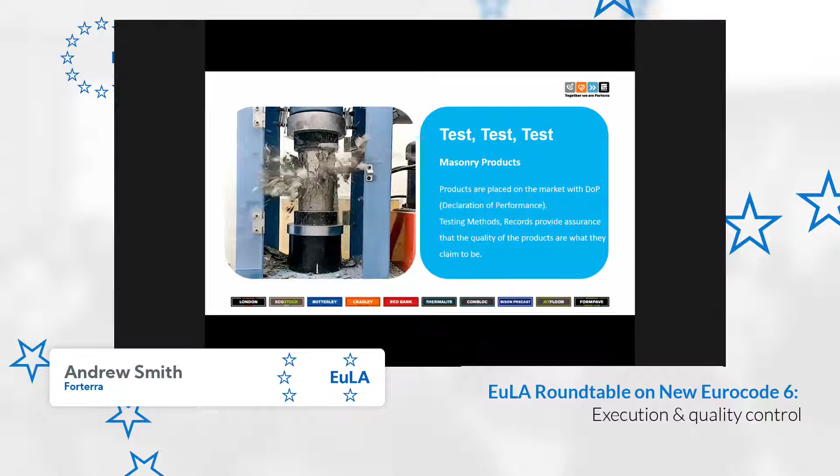This is slightly different when we come into the realms of the built environment and how our products are used. And basically, what we're looking for in this context is some form of standardization, or at least an agreement with regards to the process of construction. And this is where the Eurocodes do come in. So if we're trying to standardize the construction process, then the obvious way to go is the way we've gone in much of our production facilities, is to automate.

But whilst robotics and systems are in place, they haven't quite yet made it from what I would call the factory-made masonry applications. They haven't made it out into the big, wide, real world where it rains. Well, certainly in the UK, it rains very regularly, or occasionally, as today, we have a nice spring day, but the temperature overnight was very cold. So automation, robotics is only part of the answer. And whilst there are systems out there, we haven't really got there yet with regards to how we use these systems in order to facilitate the standardization of the construction process.

So with that in mind, we have to use what's known as the human interface, and that is the construction labor force. And this is important because they are sentient beings, our construction sector workforce, and they think for themselves and they do things. Whilst we can provide them with instructions, sometimes they don't follow those instructions, and therefore we need to make our construction materials and the process of construction as simple and, as I said before, unambiguous as possible. So what do we need to do? Well, in essence, we need to define the task.

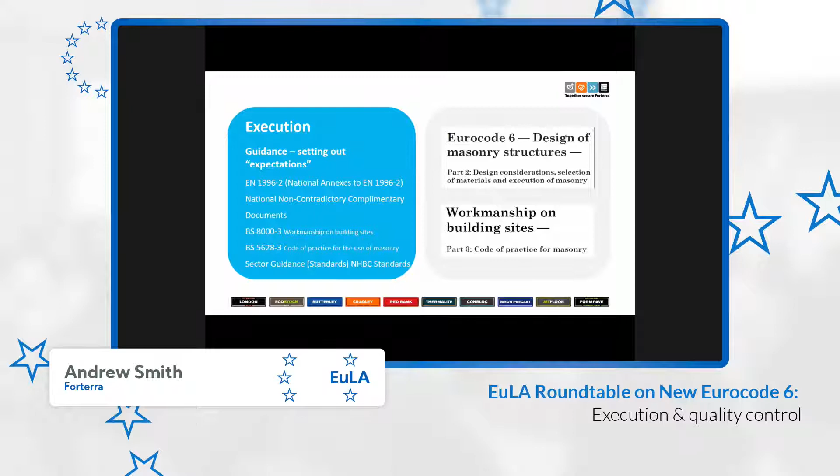In addition to that, we also have sectoral guidance documents or pseudo standards. For example, within the context of house building or domestic dwelling building, we have the National House Building Council's standards, which is essentially a manual very similar to a European standard, but it lays out both the context of what the standards for the product should be and how they should be used. So there's a lot of guidance out there with regards to how we can execute construction, in particular use of masonry.

But that leads us into the subtle nuances of individual parts of Europe that have slightly different approaches to this. I'll use two examples here where certainly in the UK we have the human interface element of it still somewhat to be desired in terms of total quality on building sites. And that arises to problems coming from protection for the weather during the build process, and also jointing.

For a lot of Europe, I know the jointing process is something where basically the masonry units are bonded together, and then subsequently a specific specialist contractor comes on and finishes off and does the pointing of the joints. In the UK, that is done simultaneously by the mason or bricklayer, and that can result in a number of issues, particularly these days where we're using very lean mortars - meaning very low cement binder contents for masonry construction, where the actual pointing of the joint is very important for the overall longevity and durability of that masonry structure.

Going back to the first one, protection from the weather - the issues we find there are that if during the winter periods, particularly when the temperature is hovering at or about 0 Celsius, there's potential for frost in the overnight periods, which can subsequently lead to damage of wet mortar during the initial curing and setting phases it goes through once the mortar has been laid and the masonry units are being built up. So it's very important to protect that.

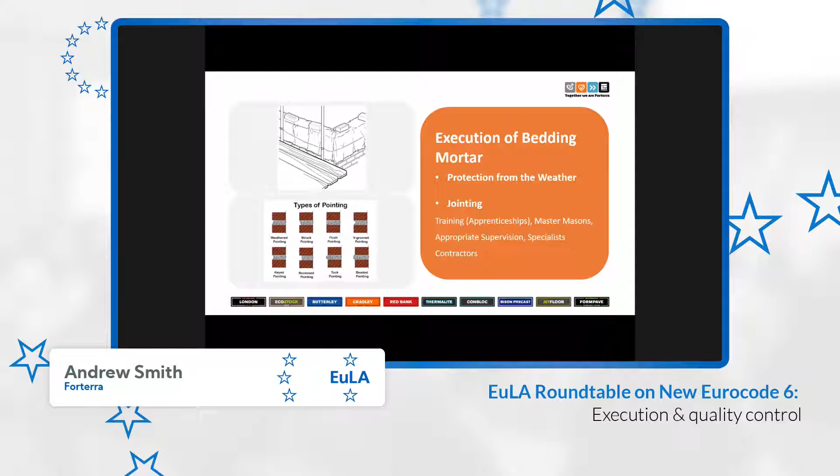So in summary, execution of masonry, as far as the Eurocode perspective is concerned, should evolve over time. It should incorporate best practice, and ultimately that is what it is - a document that shows best practice, but it should focus on outcomes. Going forward, we need to be outcome-driven as opposed to prescriptive in terms of the process of achieving those outcomes.

It should reflect the national or local styles of masonry construction, because that's what gives masonry the beauty behind it. I can compare masonry from the Netherlands with masonry from the UK, with masonry from Spain or Portugal, and they all have their subtle intrinsic differences that make them unique to a regional context, but also the attractiveness and variation that is so attractive to an architect.

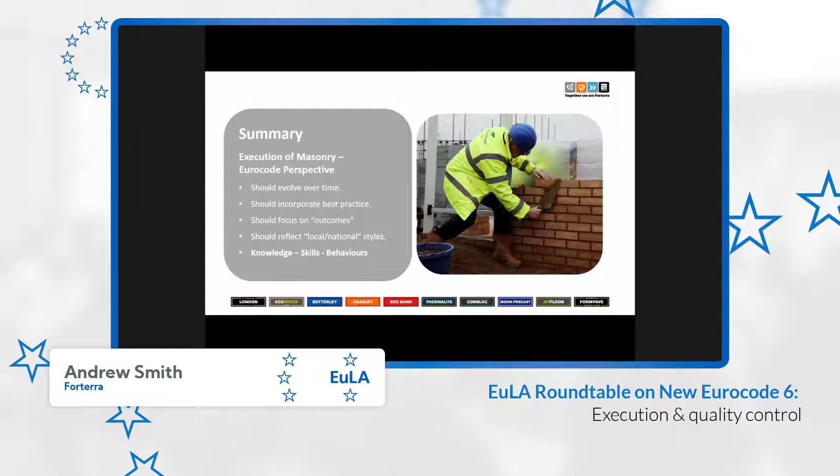But the last point I would like to make is that it is all about three key elements. It is knowledge - the passing on of knowledge from us, the experts in the materials sphere, to those who are experts in the construction sphere. It's the skills required to execute high precision, high quality construction. And finally, it's the behaviors behind how we communicate, how we translate, how we see those different construction projects going forward. So I'd like to thank you for your attention, and I'll hand over.

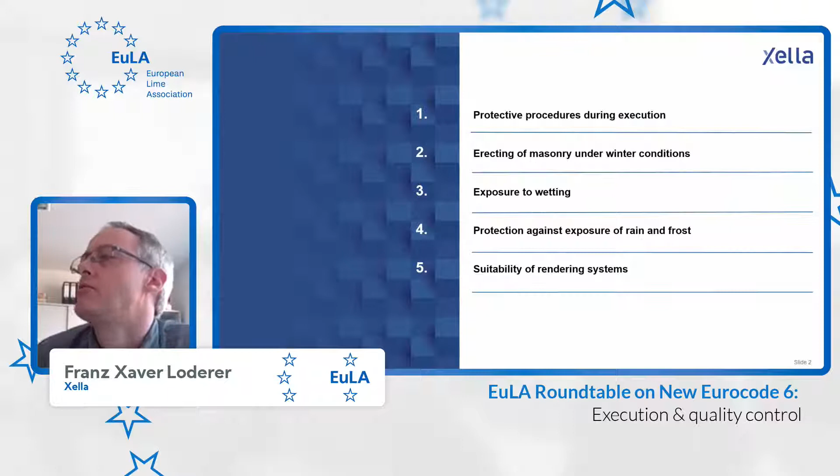Just to give you an idea of what I will talk about: I'll show you some protective procedures during the execution of masonry. One point, which Andy mentioned already, is that it's a difference in which region you erect masonry - you have very different conditions. Winter conditions are not a topic in every country, but in many, so it's a very important topic to find a good solution for that. We have exposure to wetting, and related protection measures against this wetting and exposure in general, not only in terms of rain, but also frost. At the end, I want to show you some additional possibilities for how to find suitable rendering systems, which can help protect against rain and frost.

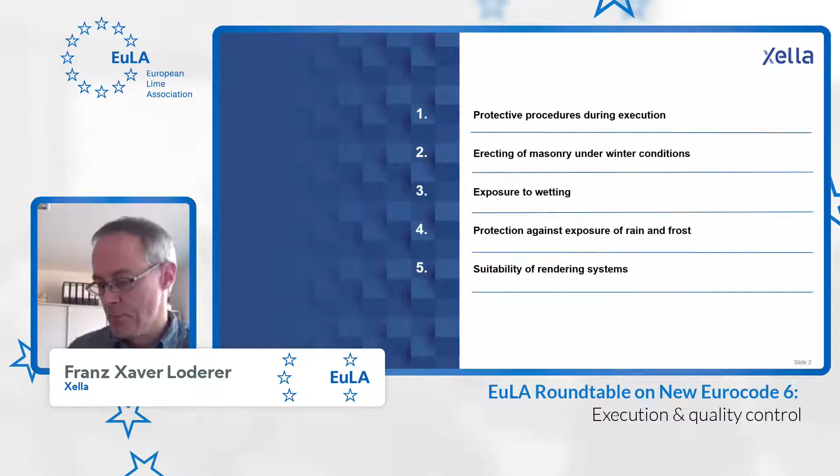So to go directly into the standard, that's a text coming from the latest draft of EN 1996 Part 2, from the 2020 draft. There is one chapter, protection against rain. It refers first to the completed masonry, that it should be protected from rain falling directly onto the construction. That's clear, especially in the phase when the mortar joints have not hardened completely up to that time.

When you have jointing, the joints shouldn't be washed by driving rain in that phase, so you have to protect that. For the completed masonry, sometimes there are additional measures like a provisional downpipe, which shall be installed. It's important that you do that directly after you finish the masonry works, so there are no long time periods in between which could damage the masonry, for example by wetting.

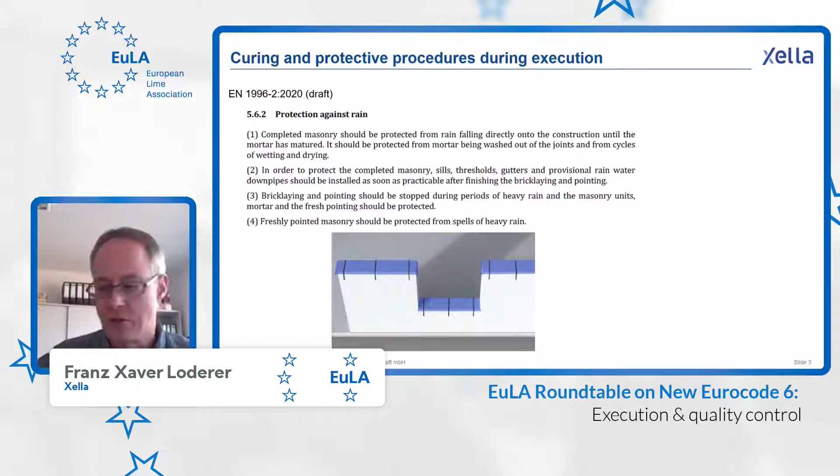If you have heavy rain, it's clear that you should stop the bricklaying and wait for better weather periods. This is also true for freshly pointed masonry - you should protect the pointing works, for example by covering with special foils or whatever, just to protect the pointing.

In terms of winter conditions, there's another chapter from the standard, the next one, 5.6.3, protection against freeze and thaw cycling. You should avoid damaging especially freshly completed masonry and pointings - you should protect it against freeze and thaw cycles, and you should not use frozen materials for bricklaying works. Both messages are very simple, of course, and very general.

So I'll give you some examples from the German National Annex, which gives some additional information about that topic. For example, there's a message that in case the place where you do the bricklaying is under such conditions, you should protect your working measures and protect the masonry against this winter impact. You are not allowed to use anti-freezing agents, which is not the case all over Europe - several countries, for example the Scandinavian countries, allow the use of anti-freezing agents.

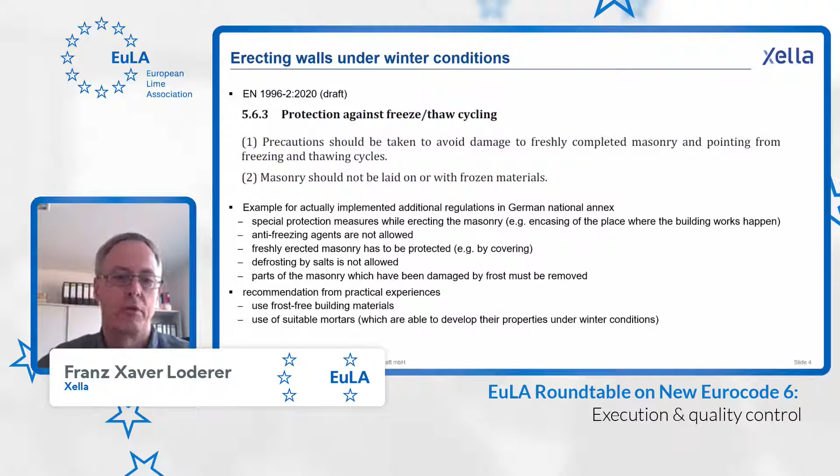For Scandinavia, for example, there are special mortars which can be used even down to -5 and -10 degrees, but nevertheless, you have to keep in mind that you should not use frozen materials - that's sometimes the problem. You have a good mortar, but if you use frozen materials, that's of course not helpful to reach good quality.

The standard also contains a table of classification of micro conditions of exposure of completed masonry. I don't want to go into this long text too much, but just to give you an idea, I concentrated on the topic.

Wetting and frost conditions - there are some other classifications in the table. So MX1, that's a clear message that you have a dry environment. That's the case for the interior of buildings, but also for masonry which is covered by renderings, for example, and not having the combination with heavy rain.

The next one is the situation that the exposure covers also heavy rain, but not in combination with frost or aggressive chemicals.

And the class MX3 covers heavy rain plus freeze and thaw cycling.

The standard also gives, in Annex B, an idea - at least that's an informative part. So we have to see what the national definitions will be regarding that table. But at least this table B1 gives you an idea of what building materials you can use under what conditions. As I mentioned, it's informative, so the transfer will also be related to the experiences in the different countries. You have to see what the national requirements will be regarding that topic.

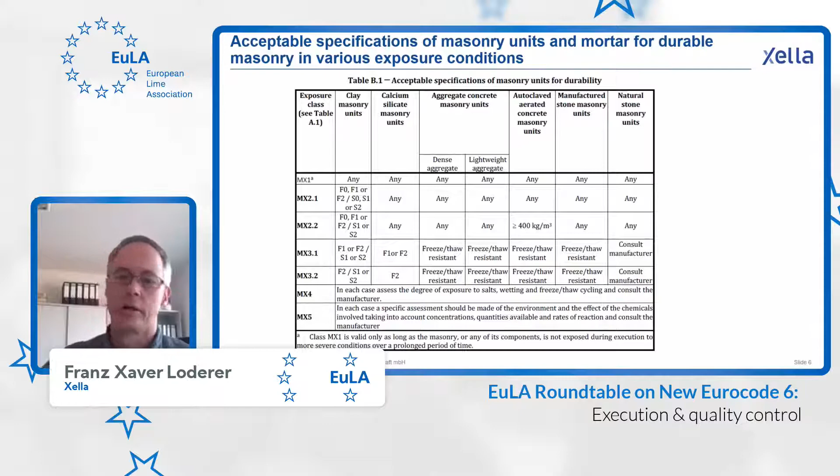What is interesting and really helpful - we had a similar part already in the last version of the standard - is that you see drawings describing the micro conditions of exposure. So not only the general message about the exposure, but also showing, okay, when I have that detail, that part of the building, I have that impact - like a coping with overhang or without overhang, different solutions which are shown here in the different details.

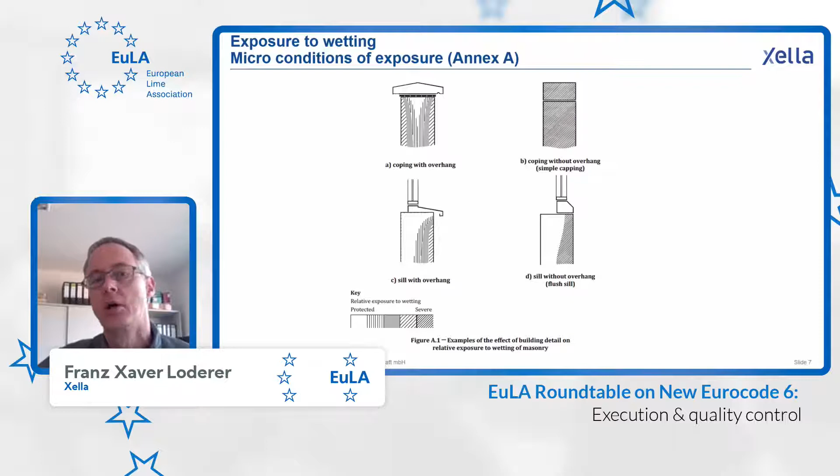And you have at the bottom a rating for the exposure of wetting. So that's, in my eyes, rather helpful to have this description and this drawing. Of course it's general and it's just giving a general message, but in my eyes very helpful for the engineer to check the impact.

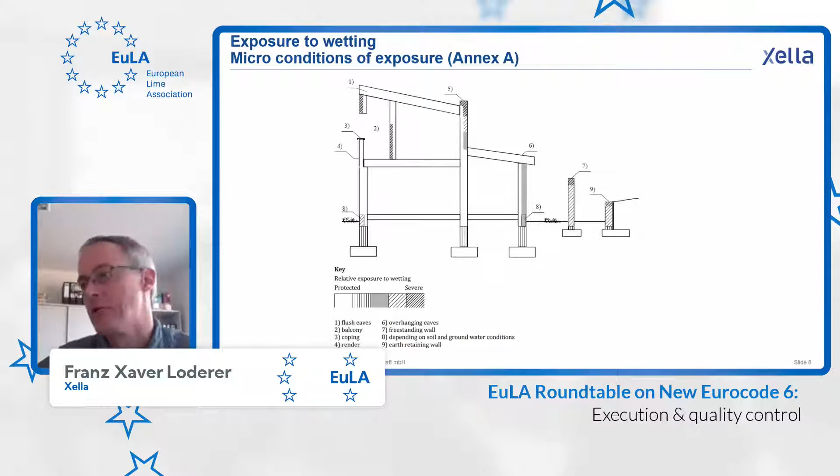That's then transferred also to a building. So you have the same rating at the bottom, and partly the same details, but now you see the whole building and the difference - for example for the eaves, number 1 and number 6, if you have a flush eave or an overhanging eave. So there is, of course, a difference in terms of the impact of wetting on a building and its construction parts. In my eyes, that's shown here nicely so that you already have a kind of general rating.

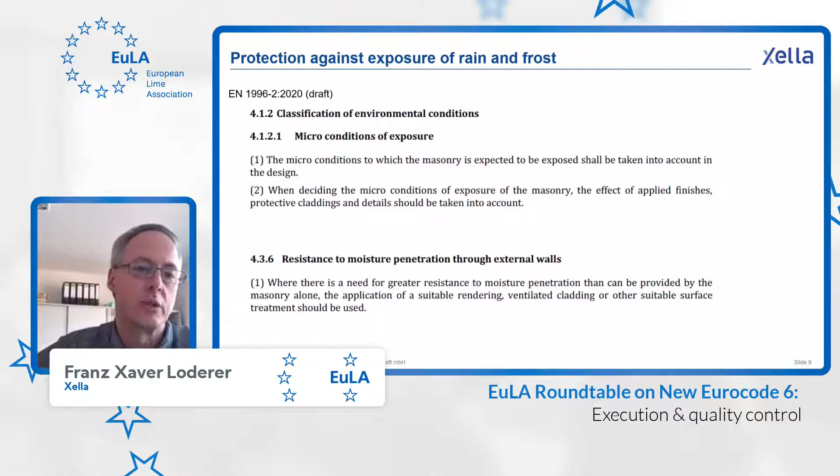There is a reference in the standard giving some qualitative ideas. So of course the conditions have to be respected for the design - you have to use appropriate building materials. For example, when you use it without rendering, you should use the right materials, which in a region with frost should have frost resistance, and points like that. If you have a very high, for example, moisture penetration through external walls, you have to use a suitable rendering, or ventilated cladding, or other solutions which can handle that topic. That's qualitative, of course, but related to the tables I showed before.

As a final point, I want to mention the additional information given by manufacturers - for example, the associations for building materials, for rendering systems, and also for the building material itself, like brick or AAC or calcium silicate. They give you messages about how to do protective measures for the completed masonry. One point is to use suitable rendering systems. So there is general information about that coming from the associations in the different countries.

But we, as a producer of building materials and also of mortars, made our own guideline and defined a method to check the suitability. The method is that we erect whole walls with an opening in them. We expose that to special climatic cycles, which take around four weeks, similar to what you do for ETICS. We put high temperatures up to 70 degrees on it, then cool it down by rain. We check afterwards the bond performance of the render and between the render and the substrate. We check the moisture distribution in the construction, and we check all the material properties of the rendering mortars which are part of the test.

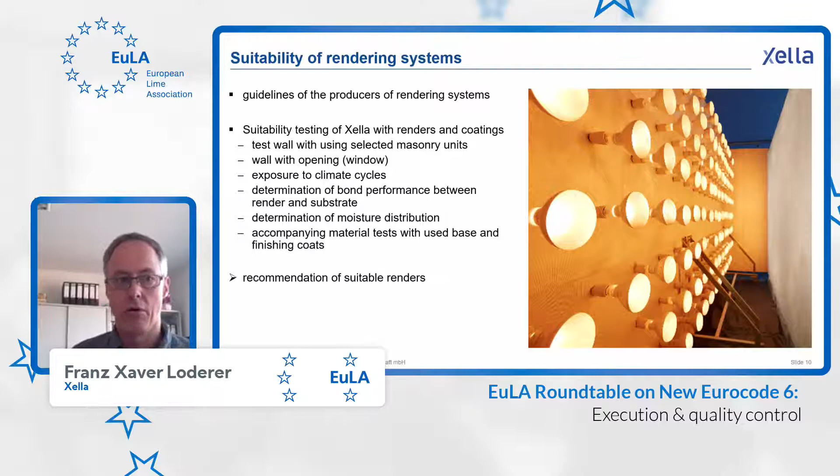And if it's suitable and fulfills everything we defined, then we give a recommendation for such suitable renders. So that can also be helpful to check the data provided by the producers - they have a lot of experience and can give a lot of information on the right combination of materials.

I hope that gave a bit of an overview about the content of EN 1996 Part 2, and perhaps also a small hint about which information could be helpful to provide in the national annexes.

I thank you for your attention. I'm looking forward to discussing the topics with you, and of course also looking forward to hearing Dr. Meyer in the next presentation and getting some information especially about thickness and quality of mortar joints.

Thank you very much, Franz, for a very interesting and detailed presentation. By the way, this is one of the really interesting points here in this discussion: going into the details, because that's where many things are solved. It's in the details, and the fact about microclimatic conditions was really, really interesting.

So Udo Meyer has started - you are a very well-behaved presenter. Thank you, Udo, because you started immediately on what needed to be done. So I would hand you the floor, and I wish you a great presentation. Thank you.

Oh, you have to unmute yourself. Thanks. So once again, thank you, Miguel. Good morning, everybody.

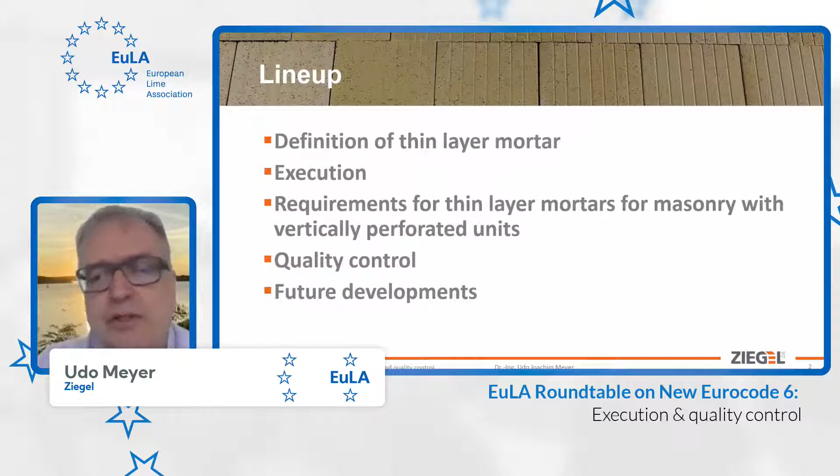I will focus on a very special point: execution and quality control of clay unit masonry with thin layer mortar. First of all, we have to define thin layer mortar. Then we have to look at the execution and requirements for thin layer mortars. Finally, quality control and possible future developments.

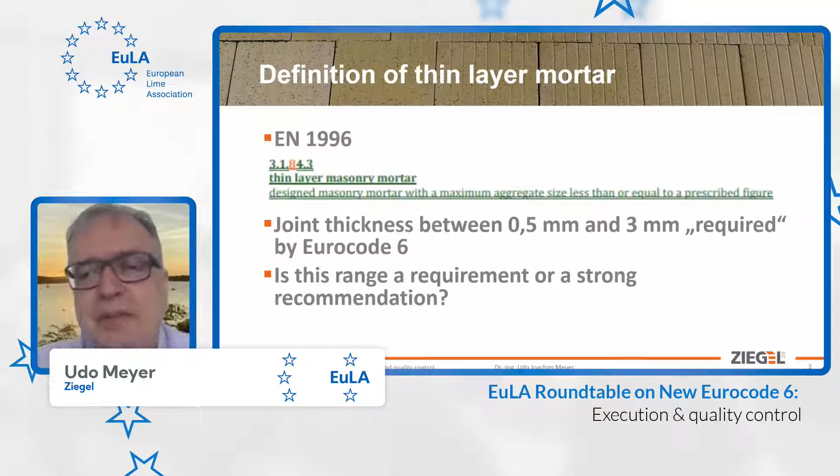In EN 1996 Part 1.1, thin layer masonry mortar is defined as a designed masonry mortar with a maximum aggregate size, and the code says it is related to a joint thickness between 0.5 and 3 millimeters. It's of higher interest whether this range is a requirement or a strong recommendation, because when talking about mortar joints in general, we say roughly 12 millimeters, and nobody cares if it's 9 or 15 millimeters. Here we are in a range of tenths of a millimeter, with a rather defined range, and we are in danger of missing either the lower or the higher boundary and facing the consequences related to that.

For the special case of clay units, they are fired before being delivered, and after the firing, these clay units for thin layer masonry are ground with specially developed grinding machines. Here's a photo with two consecutive grinding steps for units running in a row. In that special case of ground units, the unit tolerances are much smaller than 1.0 millimeters, and in one batch often even smaller than 0.2 millimeters.

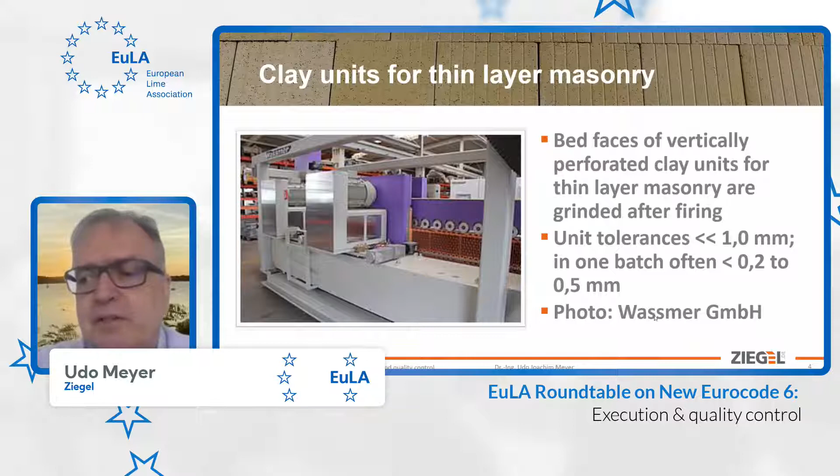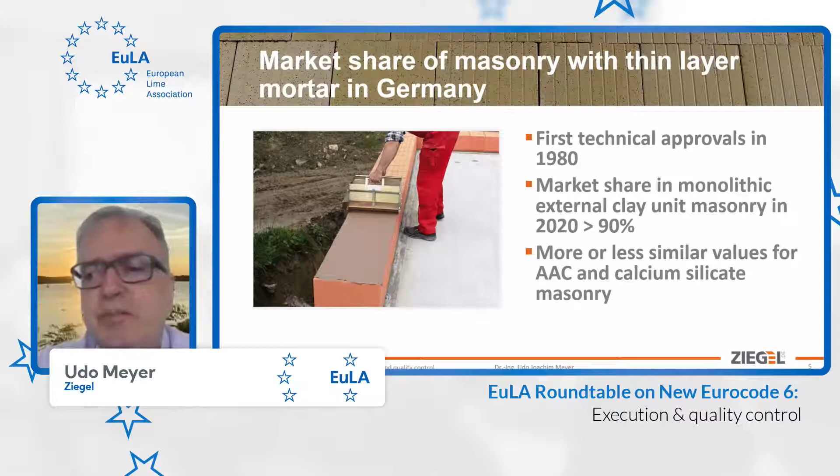This is a very, very precise shape of the unit. Coming to the importance of thin layer masonry, especially in Germany: we have the first technical approvals from the early 1980s, and today the market share in monolithic external clay unit masonry is well higher than 90%. So it is more or less the most important way of construction in Germany for clay unit masonry. I believe the values for AAC and calcium silicate masonry in Germany are more or less comparable.

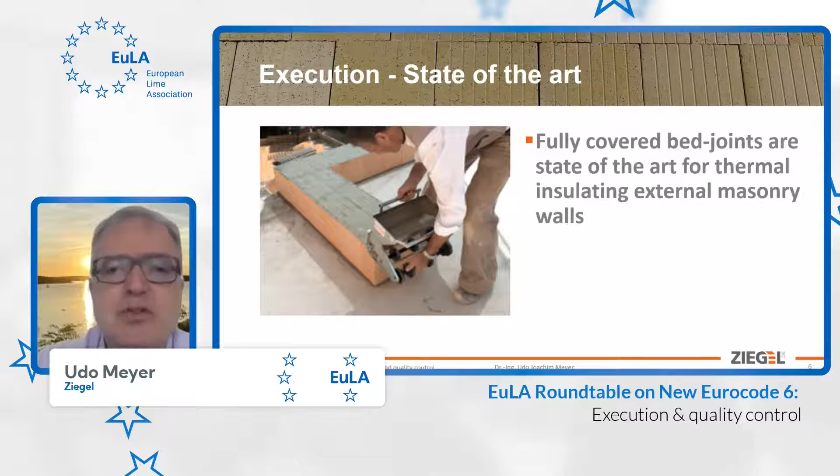About execution: the state of the art nowadays is a fully covered bed joint for the external thermal insulating masonry walls. The mortar is applied with special tools to cover the full bed joint. There was a development of application techniques starting in the 1980s, with dipping the units into the mortar and putting them on top of each other. Then some types of rolling devices were developed and applied, and for more or less 20 years now, the application of a fully covering mortar layer with special tools has been more or less standard for external masonry especially.

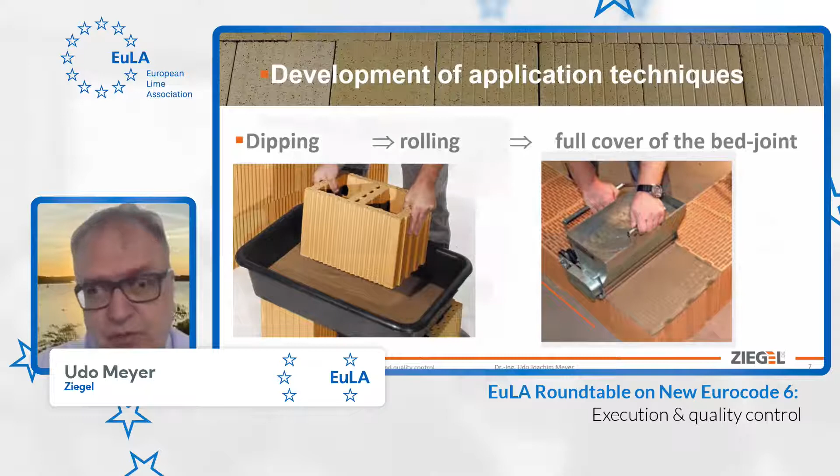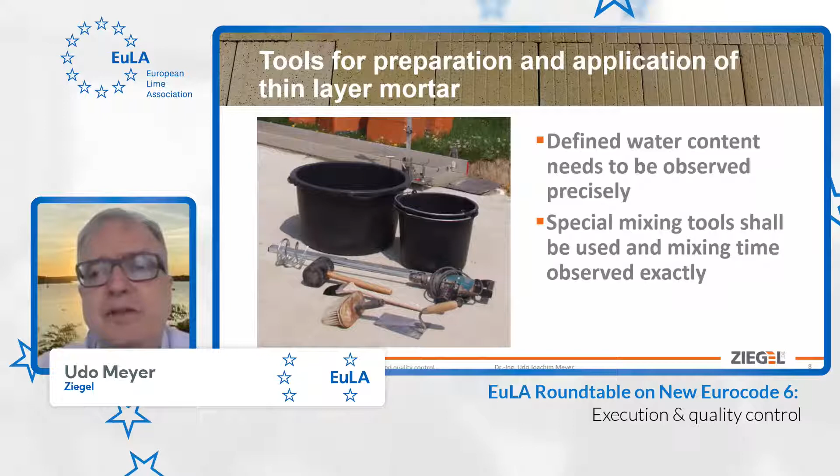When talking about the masonry mortar for thin layer joints, we have to prepare this mortar very carefully. We observe precisely the defined water content to get a mortar suitable for this application. We also highly recommend using special mixing tools and observing the mixing times exactly to get a good quality product for the execution.

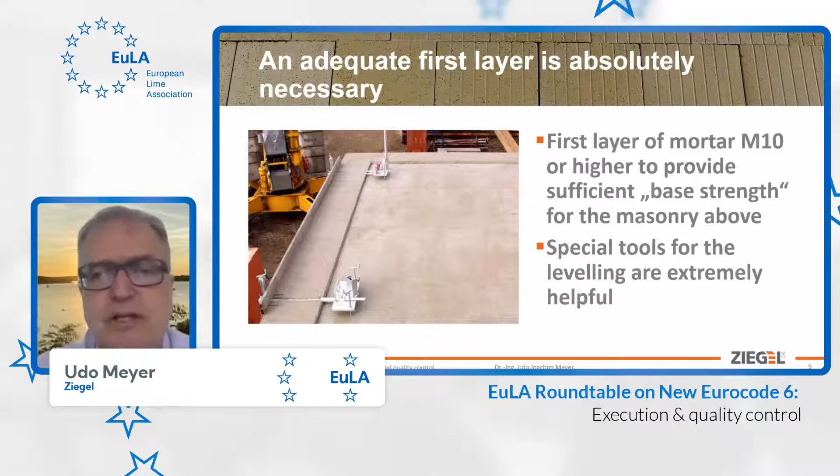On top of that, an adequate first layer is absolutely necessary, because the first row of units has to be absolutely exactly precise leveled, and the first layer has to provide sufficient strength for the masonry on top. You do not know if this first layer is in a 6-story building or a 1-story building, so mortar strength is defined in Eurocode 6 as mortar strength M10 for this base layer, and for leveling this first layer, special tools are extremely helpful, not to say absolutely necessary.

So once this is done, mortar is mixed, first layer is applied, bricklaying is really fast, but you shall not forget that the tools necessary for applying the mortar have to be thoroughly cleaned afterwards. So this takes some time in the end.

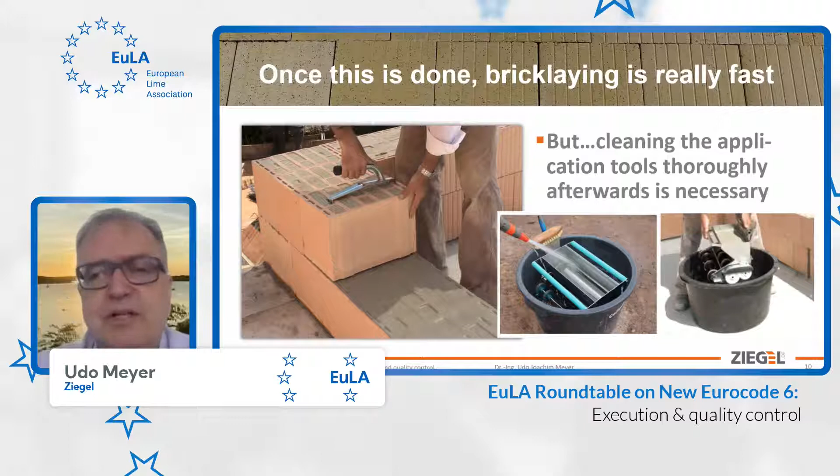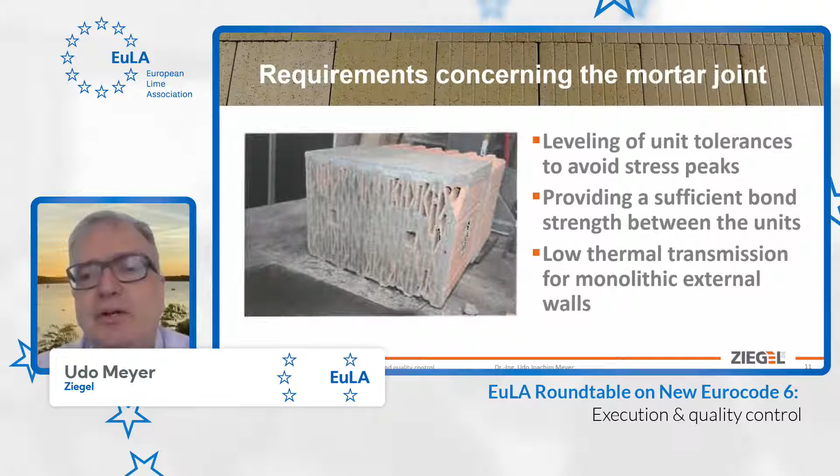And requirements concerning the mortar joint: the main task of the mortar joint is leveling the unit tolerances to avoid stress peaks, to provide sufficient bond strength between the units, and to not increase the thermal transmission through the walls. So these points have to be addressed by the thin layer mortar.

A bed joint shall be fully filled with mortar to avoid stress peaks and to provide a good bond. This might not be totally easy for vertically perforated units. You do need a special mortar formulation to avoid the mortar applied on the bed face dipping into the holes, and you should, or must at least, cover all webs and shells available with the thin layer mortar.

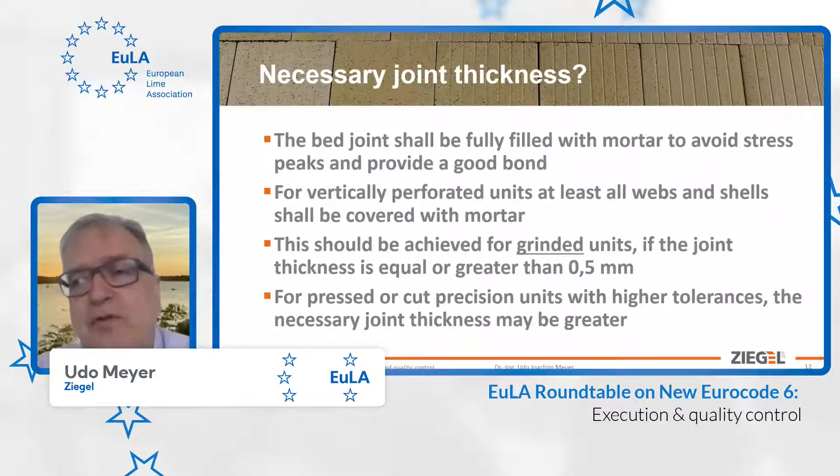Leveling should be achieved for ground units if the thickness is equal or greater than 0.5 millimeters, and this is the case for ground units. For other precision units prepared in another way, maybe by cutting or pressing, the joint thickness may be greater to provide avoidance of stress peaks in the masonry.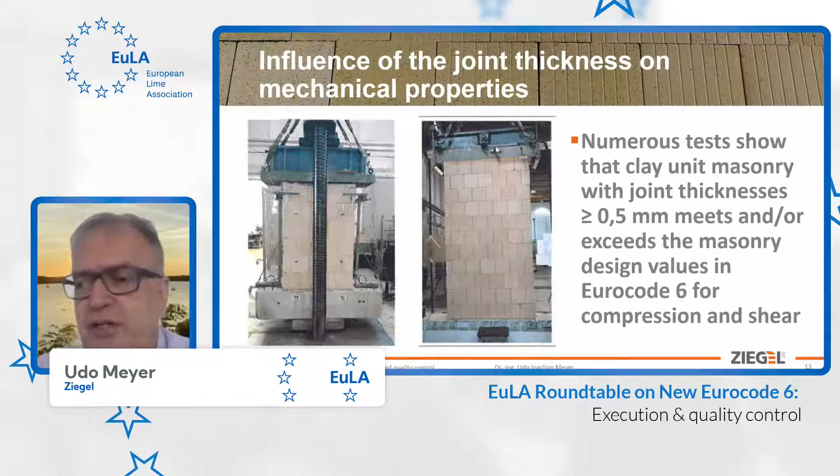We did a hell lot of tests on thin layer masonry in the last 40 years, and we measured joint thicknesses during these tests, and we can say that with joint thicknesses greater or equal than 0.5 millimeters, we are able to meet or even exceed the masonry design values in Eurocode 6 for compression and shear. And this even if the requirements for bond strength tested with the EN 1052 part 3 tests are not met in all cases.

So coming to quality control, my idea is that a fresh mortar thickness of ±2 millimeters, which can be defined by a gap in the tool for the application, ensures a sufficient joint thickness and is highly recommended by our producers.

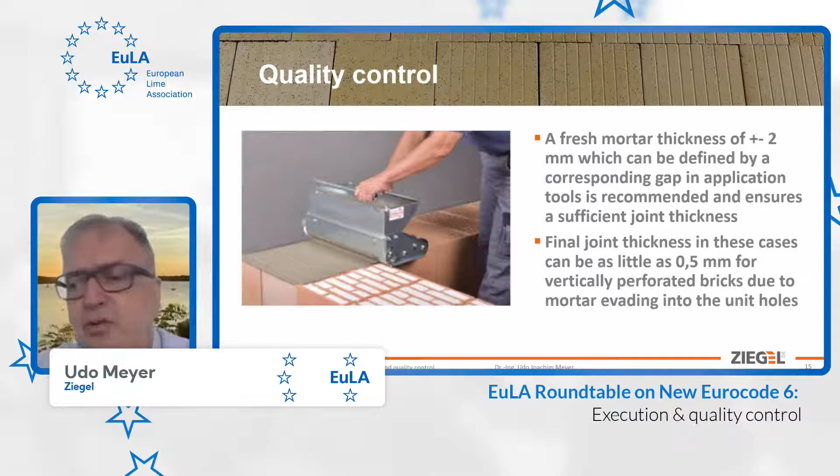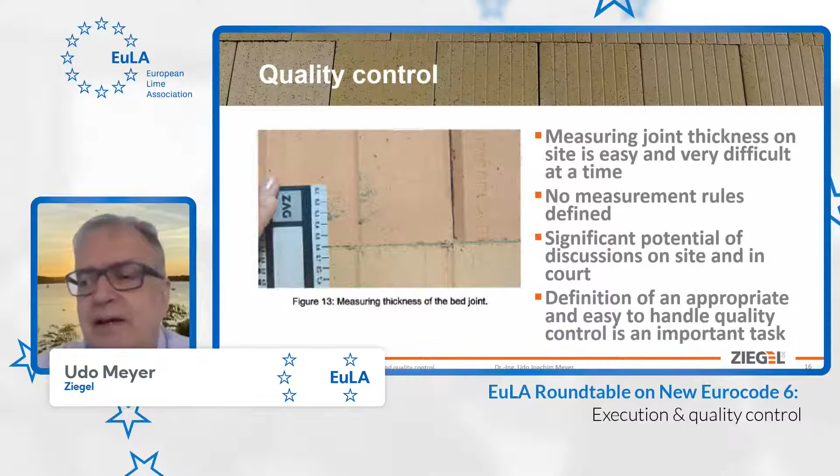Nevertheless, the final joint thicknesses in these cases, with an application of 2 millimeters, can be as little as 0.5 millimeters for vertically perforated bricks, because mortar may evade into the unit holes. So measuring the joint thickness, quality control is easy on one hand and very difficult on the other, because no measurement rules are defined and anybody can measure anything, and this gives significant potential for discussions on site, and as we saw in Germany in recent years, also in court. So the definition of an appropriate and easy to handle quality criterion is an important task.

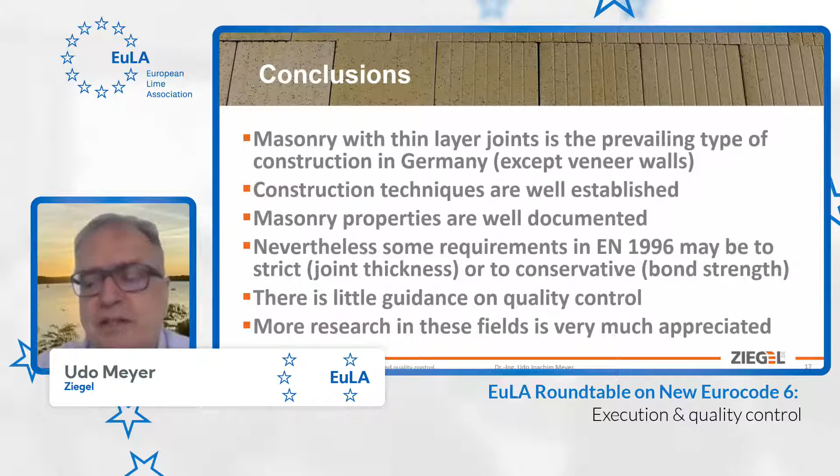Coming to the conclusions, masonry with thin layer mortar is the prevailing type of construction in Germany for load-bearing walls, except veneer walls. Construction techniques are well established, masonry properties are well documented, and nevertheless, some requirements in EN 1996 may be too strict, maybe the joint thickness, or even too conservative concerning the bond strength determined with the test setup according to EN 1052 part 3. There is little guidance on quality control for measurement. This is in some cases a problem, and more research in these fields is very much appreciated.

What will be the future? Probably thin layer masonry is a very fast way of construction. Cleaning of the application tools is necessary and time consuming at the end of the day, and so people are thinking about improvements. Some developments, not saying improvements, are shown on this last slide. People are using prefabricated mortar pads that are wetted and bond the units together. People are starting to use foams, and I'm rather curious what ideas might come up in the future.

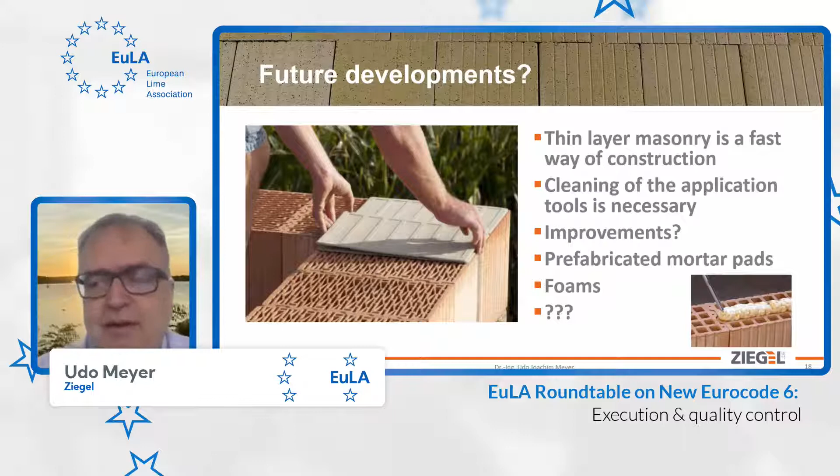Okay, thank you very much, Udo. Yes, you stopped sharing your screen. So we do now have roughly half an hour for discussion, which is a very nice extended period of time so that we can go deeper into some aspects. These were 3 very interesting presentations that were pretty much complementary, and this was a fruit of coordination also between the presenters, so I also acknowledge this and thank you for that. It is now my job to try to coordinate here some sort of structured discussion, and we do have a couple of questions placed online, and we could address them in a sequential manner, of course.

And I would start with one aspect which relates to the structuring, and particularly to Andy, the first presenter, the structuring of the discussion of this revision to the Eurocode. So where are we now, even for the people watching that are not so into the process of this revision?

So what are the timelines and the discussion periods that are being hosted with the national committees, national mirror committees, and to what extent is this involving the industry in general, so that everyday appliers, the industry not involved in the committees, can somewhat be informed and even contribute in some way? Is this something you could address a little bit and elaborate?